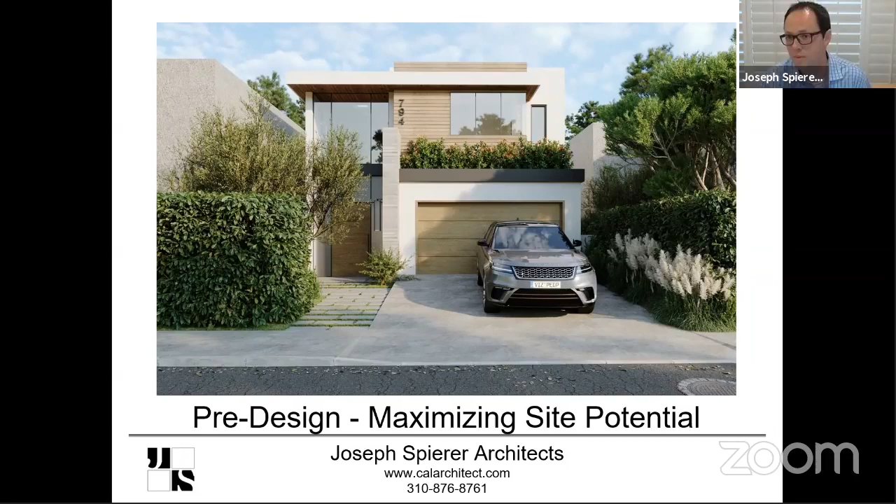There are 9 of us right now, and we specialize in high-end custom single-family residential architecture. We also do some multifamily and commercial as well, depending on the project. But basically, my experience has to do mostly with figuring out single-family residences and making sure that they work properly, and making sure that they're going to be designed and built correctly, because it's a long process and there can be bumps along the road, and the idea is to prevent as many of those bumps as humanly possible.

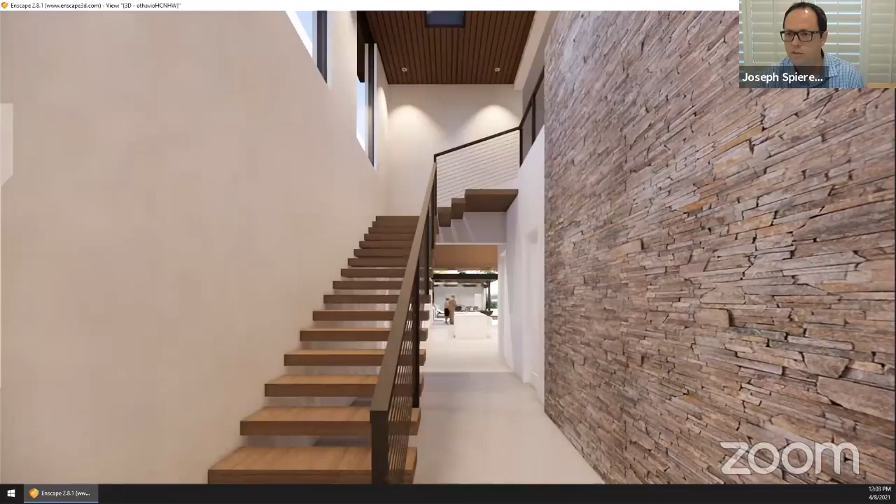So I wanted to start by showing you guys a new software that we use here. This software allows us to—you guys can see me moving around, I assume, right? Here, yep, we see it. Okay, 3D view. So basically this software allows us to show our clients what the design is going to look like inside of their home.

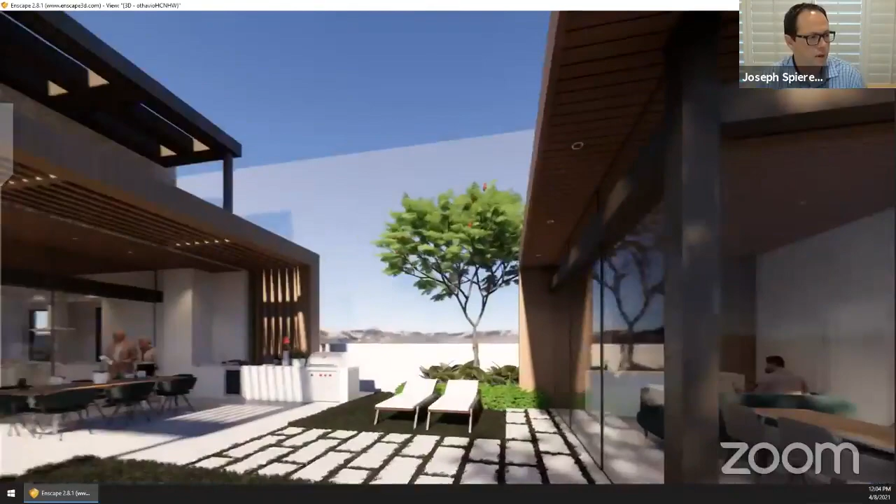I'm sure you guys are kind of familiar with accessory dwelling units as well. This is an accessory dwelling unit that we've designed on this lot in Manhattan Beach. You can see we have designed the house to work well with the structure in the back. I'm happy to chat about ADUs at some point if you guys want to. I thought this is always a fun thing to show at the beginning, to show the power of what's possible now from a design and presentation perspective.

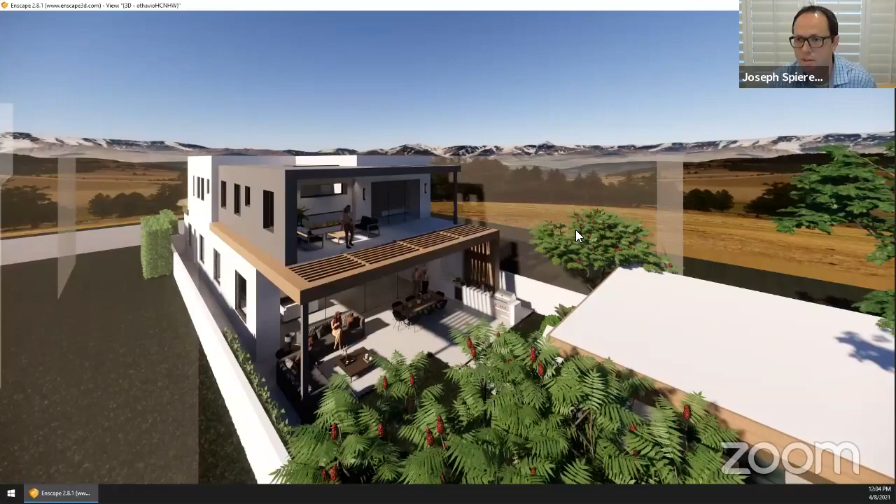Kind of fun. All right, so I'm going to re-present my PowerPoint.

So basically what I'm here to talk to you guys about today is pre-design, right? There are different phases of architecture, and they all have to do with design and permitting typically. Pre-design is a phase that occurs prior to anything being designed, it's called pre-design for a reason. It usually takes place during, let's say, escrow—it might take place during your inspection contingency period, during that 17 days, figuring out what can and cannot be done on any given piece of property. And there are different types of analyses that need to occur.

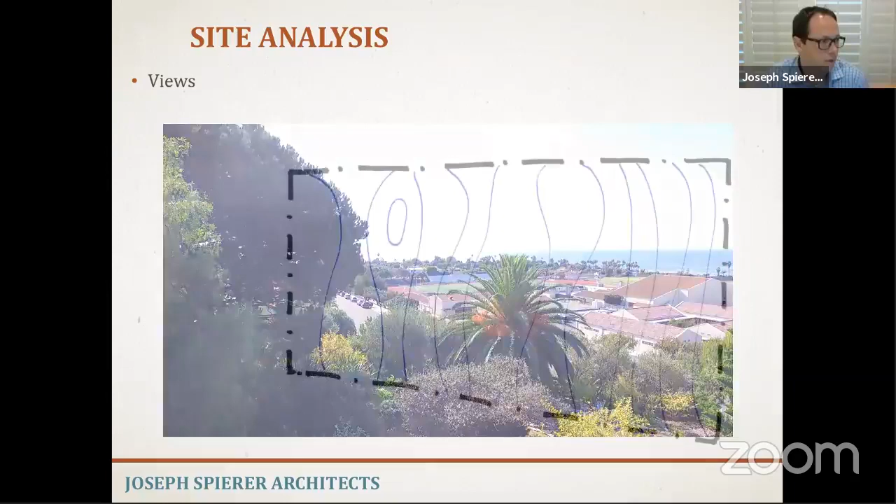Let's take views, for example. Imagine you have a slope—these contours indicate a pretty steep slope.

I'm going, I'll talk to you later on. I got, I'm in a class. By the way, feel free—if you guys have questions, feel free to interrupt me. I am more than happy to take questions during the presentation. This is a small enough group where I think it would be a-okay to do that.

All right, so site analysis—this is a pretty steep slope here. Imagine this is the top of the slope, and this is the bottom. It might make the most sense from an economical standpoint to place the house along the contours, right in the middle of the site. That's the most economical way to go about it.

However, if the view is off in a different direction, then it makes more sense from a view standpoint to put it maybe higher on the site, not necessarily in line with the contours. That's a very expensive decision to make. It's not that you shouldn't do it, but you should know the cost impact. What if the predetermined pad has a house right here, but ultimately you want to build a house right here? What are the cost implications of that?

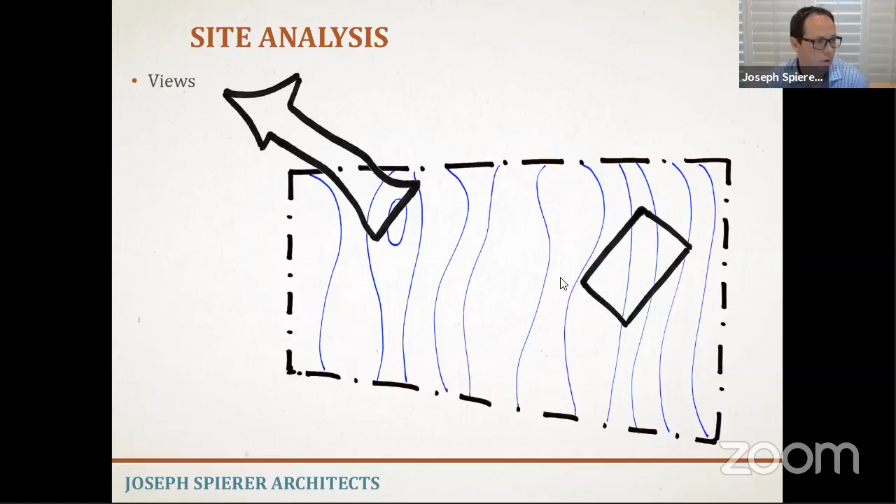That's something that we help determine during the pre-design portion of the project. You also have to know where you're putting a house and what obstacles you're going to have to deal with in any particular situation.

For example, this is a project we had in Palos Verdes Estates where you can actually see the project. I'm going to zoom in right here—you can see the flags here, coming across here. That's our project right over there.

And the view you're looking from right now is an objecting neighbor's house—this is their porch. During the process in Palos Verdes Estates, all of the neighbors have the opportunity to stand up, and they get a full 3 minutes to speak about why you are blocking their view.

This particular neighbor, where I'm standing right here looking at our project, objected—and they're I think 4 or 5 streets back. They objected because they said we are, quote, decimating their view by building this house right here. And the Planning Commission hears this—they'll actually sit there and hear it.

Knowing what the process is in any given city is important if someone is looking to develop any particular piece of land, add on to their house, add a second story, or even just do a simple interior remodel, which may have some of these issues, although not nearly as many as otherwise.

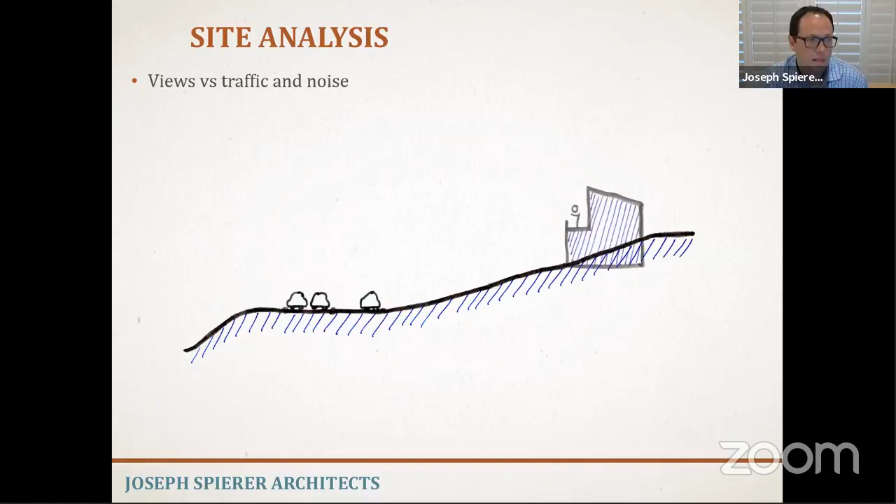From a site analysis standpoint, what are my views going to be like? It may not be as simple as placing the house and saying this is how we're going to maximize the view. It might be important to do some diagramming to understand. This is a very simple hand sketch representation to show you what we do, but ours are more hard-lined, and they'll actually go through the actual site and show you what your sight lines are.

Basically what we'd be determining is how can we maximize view while preventing some of the noise and preventing some of the other things that maybe we don't want to see.

This is a highly simplified version of a client who approached us and said, I think I want to buy this property, but only if we can block the traffic. I don't want to see the traffic from down below, and I want to make sure I can see the mountains and the water beyond. But I also don't want to hear nearly what I'm hearing right now.

So we did some analysis. It was more complicated than what I'm showing you, but basically, to show them, this is a simplified version, that yes, if you put a site retaining wall, and yes, if you put proper foliage there, you are going to be okay. So they ended up closing on this property, and they were happy that they did.

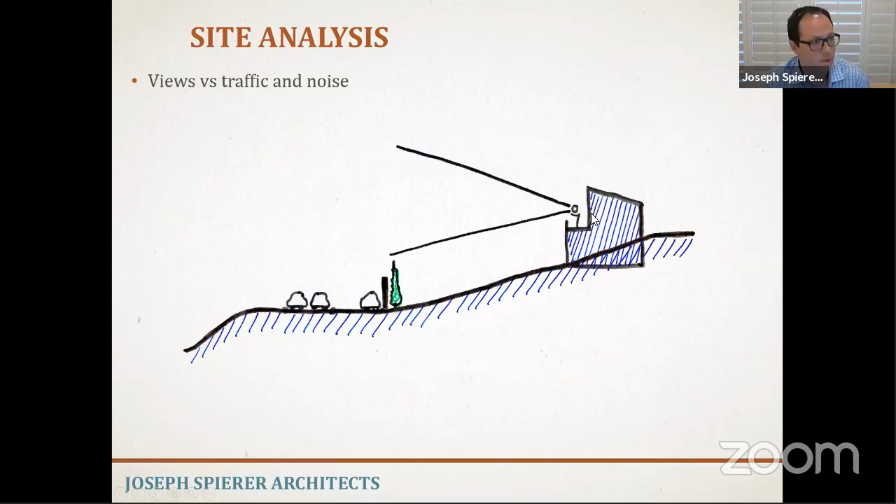Another situation that might come up for site analysis: this is a house we did in Manhattan Beach years ago, and it had power lines running, God, a foot in front of the property. They were terrible with the house that was there at that point. The house was a one-story house, and the power lines were kind of swooping back and forth right in front of their windows and everything.

So we actually did a section analysis to help determine where those power lines were going to sit. Once we put a second story, was it going to be right in the middle of this view? Or would the power lines line up perfectly with the floor plate as they come by, so we don't have them right in the middle of what we're trying to accomplish here? That's what ended up happening, we did that site section, and once we actually designed and created a house, there were no power lines in sight.

So it's an important thing to analyze at the beginning. All right, something else to think about are things that are protected, for example, protected trees on your lot.

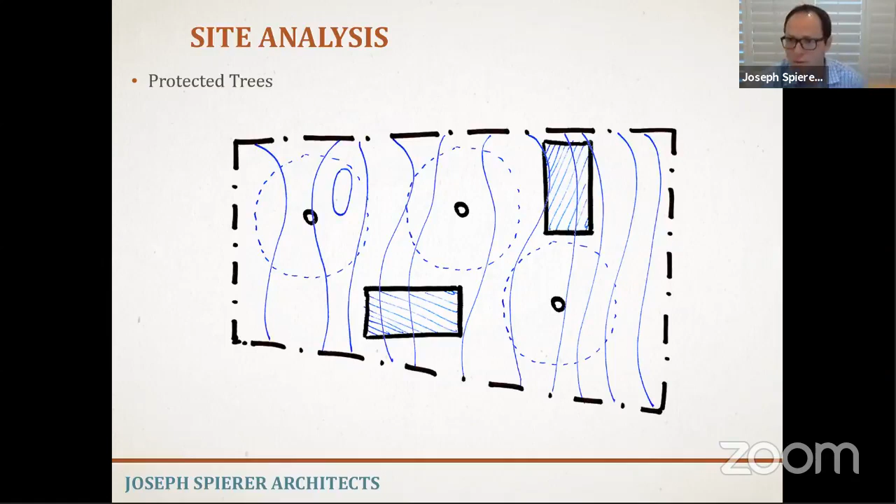Another one of the things it could be is drainage. It could be that they located it so water could go past the house properly. If you do have a house blocking the water, there are ways to mitigate that, but they're expensive, and you have underground water to contend with too. The last thing you want is hydrostatic pressure from underground water pushing up on your foundation.

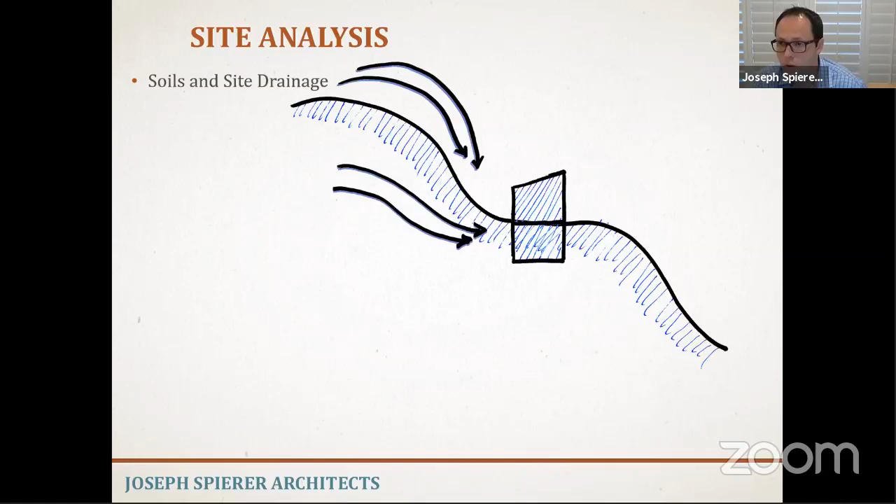If you go down into some basements, you can see that white powder on basement walls. That's water leaking through the basement, and that will eventually cause mold and other damage. Being able to know what type of situation you're going to be dealing with at the beginning is important.

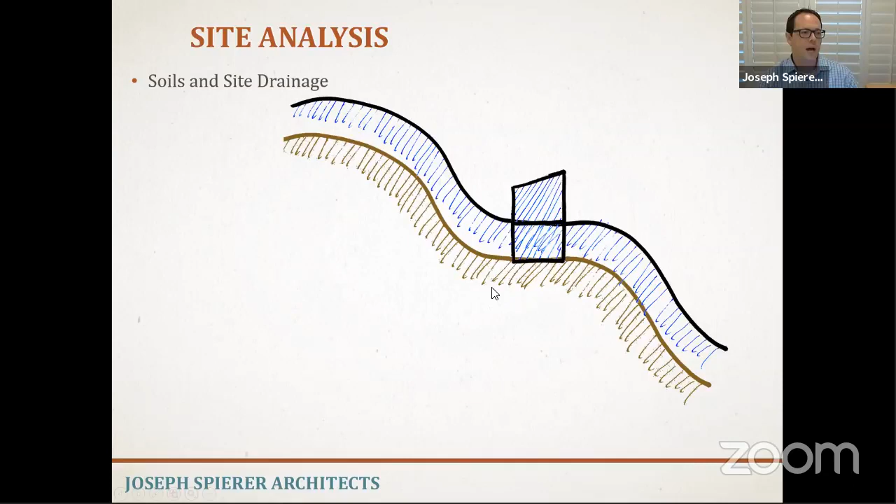Another situation might be, where is your foundation going to be? This is probably the most important thing on hillside properties: soil. It's almost always soil. What does your soil look like? Where is bedrock? If it's underneath the basement, like I'm showing here, holding up the house, that's not a problem. You have a fairly inexpensive foundation.

But if your soil is way down there, then you do have a problem, and you end up having to put these massive caissons or piles underneath the house to hold it up. And these are not inexpensive.

We did one on the cliff of Palos Verdes Estates, on Rocky Point. It's being built right now, $2.5 million straight in the dirt. They actually hired us for pre-design at the beginning to think through this stuff, and they accepted it. They said, look, I get it's going to be an expensive foundation, but I don't care, I'm ready to move on. But their attitude would have been different, I think, had they found this out after they owned the house. So knowing this information ahead of time is a good thing.

Do you have any information on expansive soil? Since right here in Torrance, we have a couple of housing tracts near our office that have that. Yeah, well, you have that a lot around here.

That's why it's important to know what the soil is composed of. Is the soil going to be silt? Is it going to be sand? Do you have water that's moving through the soil constantly, creating heaving? You have all sorts of issues, and that's why you end up with cracked foundations and all sorts of other problems.

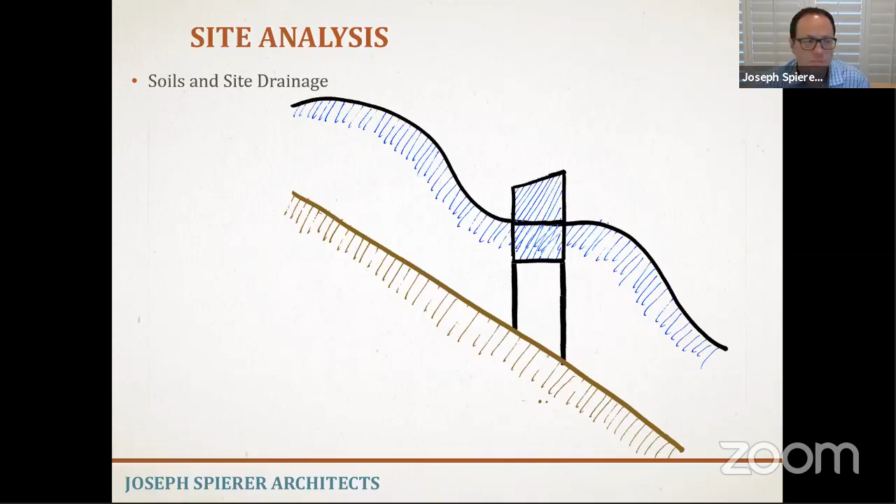But the question really is, is that cracked foundation indicative of a very difficult potential solution if you want to demolish and build new, or is it going to be something that doesn't matter much? Maybe it's done settling forever. And that's something that soils testing can help figure out.

So this is that project that I was telling you about, on the cliff of Rocky Point. This is a crane that was used to hoist these — 120-foot long steel beams. That's 12 stories of steel beam that is going to get hoisted up.

Oh, does someone have a question there? No, just noise. Okay, great. Danny, are you able to mute them? Okay, great, sounds like that's good.

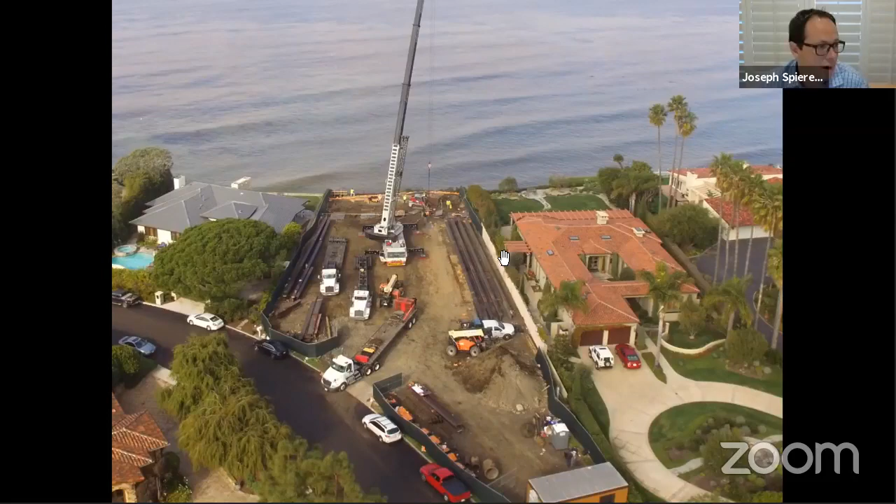That's going to get lowered into a 12-story hole so that concrete can then fill up that hole around that beam, and that's essentially what a caisson is. This is just a 1-story house that we're designing — you can actually see it under construction if you drive by today. But a 1-story house is being held up by 12 stories of concrete and steel, and again, $2 million straight into the ground. So it's important stuff to know ahead of time.

So when the hill slides into the ocean, the house will still be standing. That's exactly right. Well, that's another interesting point.

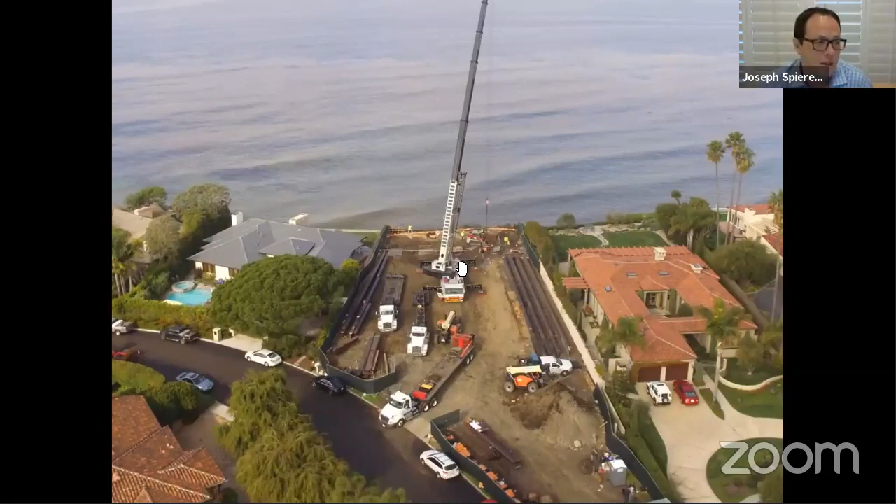Another thing we determined during the escrow period, which was fascinating to me, is that the California Coastal Commission doesn't actually let you do anything within 50 feet of the cliff, because they want it to be natural. They won't let you shotcrete the side of the cliff, and they won't let you stabilize it. They want it to slough off into the ocean as it was intended, as God intended. Basically, that means about 50 feet back was where we had to put our caissons. The rate at which my client is losing his land to the ocean is 1 foot per 10 years, so he figures by the time it gets back to him, he'll be long gone.

But obviously he wanted to be as close as possible just for the view, right? That was what the placement was for. Yeah, he has like a 180 panoramic view.

Oh yeah, the view here is outstanding. Being able to see everything from all angles is amazing. So I'm guessing that's Catalina, right, that we can just barely see in the clouds? Oh yeah, you're right. Well, actually, I don't know if that's what it is. It might just be the shadows. Catalina is out there somewhere.

All right, so height limits. This is another thing we always have to consider: how high can you go? Just because you have it doesn't mean you can still have it. There are certain areas of the South Bay, for example, where the height limits have been decreased over time. Depending on where you are, if you're in Manhattan Beach, your height limit is your height limit. That's it, it's in the code.

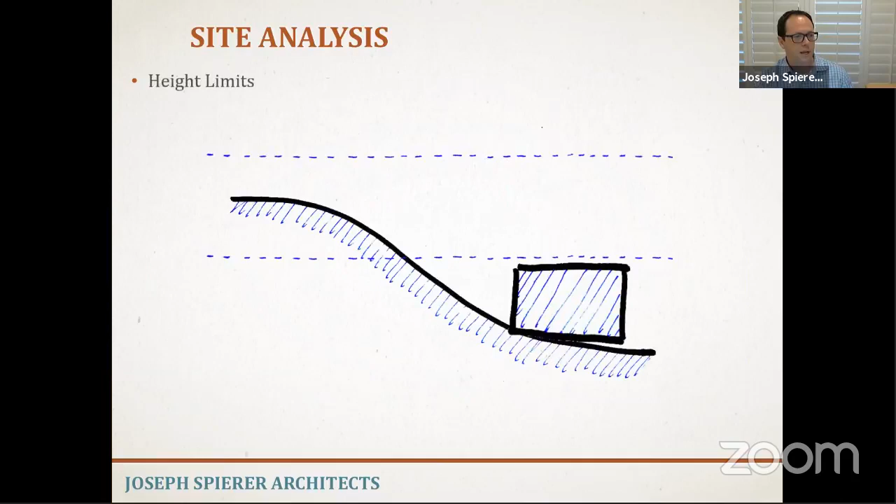There are many different ways height limits can be calculated. Sometimes it's based on your slope, so this might be your height limit in one situation. It could also be based on the 4 corners of the lot, giving another height limit. Then you'd have to dig down here if you wanted to get any sort of house in this spot. It could also be based on the lowest possible grade. We all hope it's the higher level, but that never happens—it's always something more restrictive.

A question I get a lot is about variances. What is a variance? Can I get a variance? The answer is often, unfortunately, no, but I'll explain why. Basically, a variance is meant to help someone who has an abnormal lot, an abnormal site condition—it has nothing to do with the house.

So I often get asked, well, what if I have a house built here and I just want to add a little bit into my side yard setback, or go a little higher than my height limit just because I want to? The answer is you're never going to get a variance for that. A variance, again, is meant for something that's abnormal.

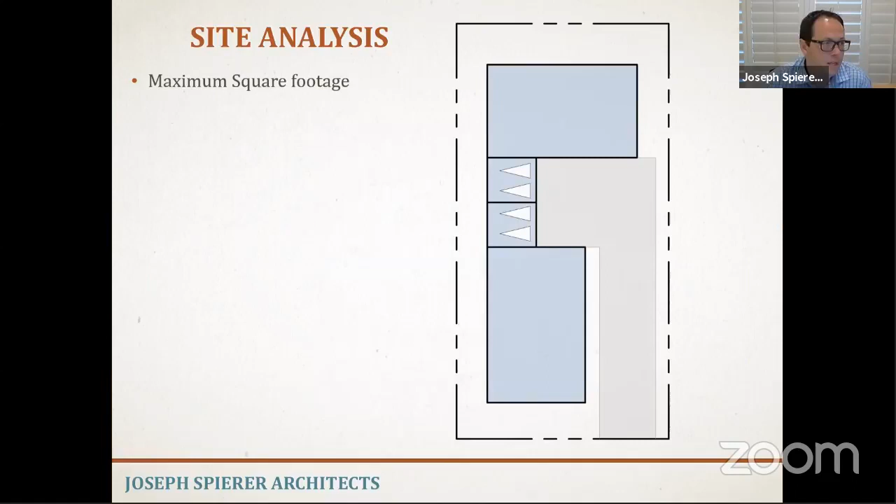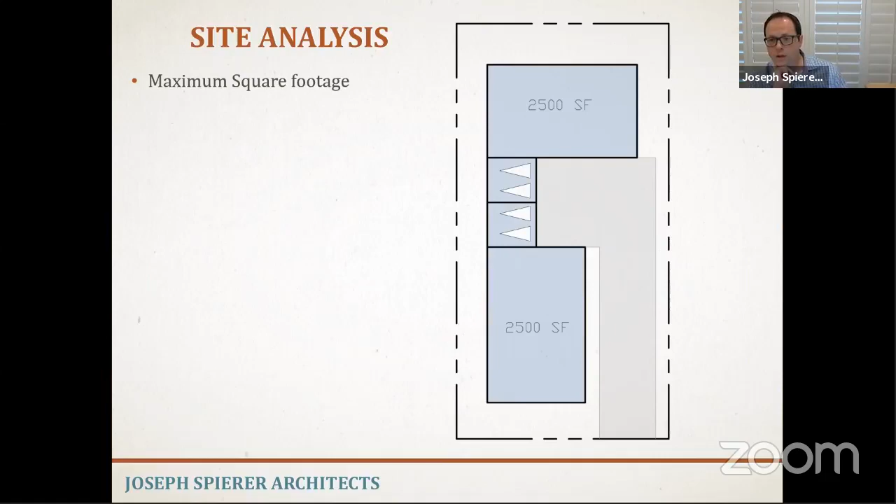So another piece of site analysis is how much can I build? Can I build, for example, this is North Redondo on a 50 by 150 lot - this is the absolute most efficient layout that can be created on that lot. Basically, part of site analysis is laying it out and figuring out what you can do. Based on the driveway requirements, garage requirements, and backup space requirements, you can get a maximum of two 2,500 square foot homes on a 50 by 150 lot in North Redondo. So this is the type of analysis that can be done here as well.

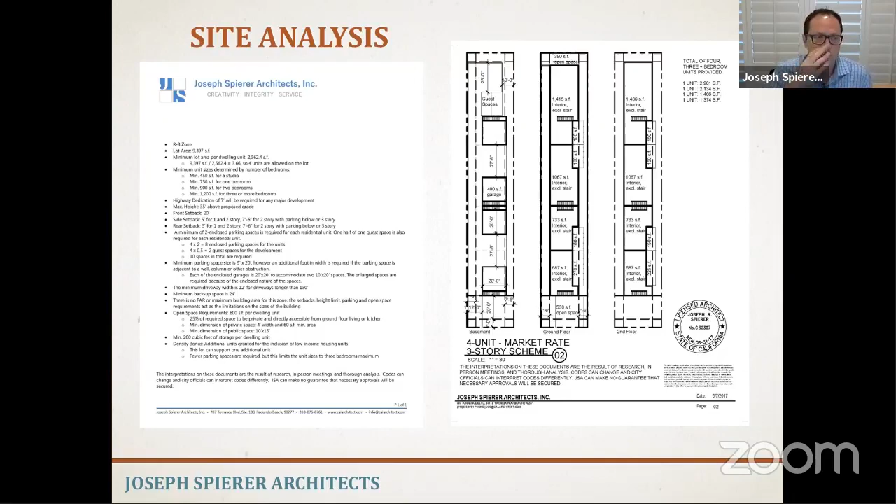We do this all the time behind the gates in Rolling Hills for houses, for example, because they have very complicated rules of what you can and can't do back there. And just because you have a giant lot doesn't mean you can build more than 1,000 square feet, right? Because ultimately it's based on the pad size, how much flat area you already have. It's based on a number of different factors, access.

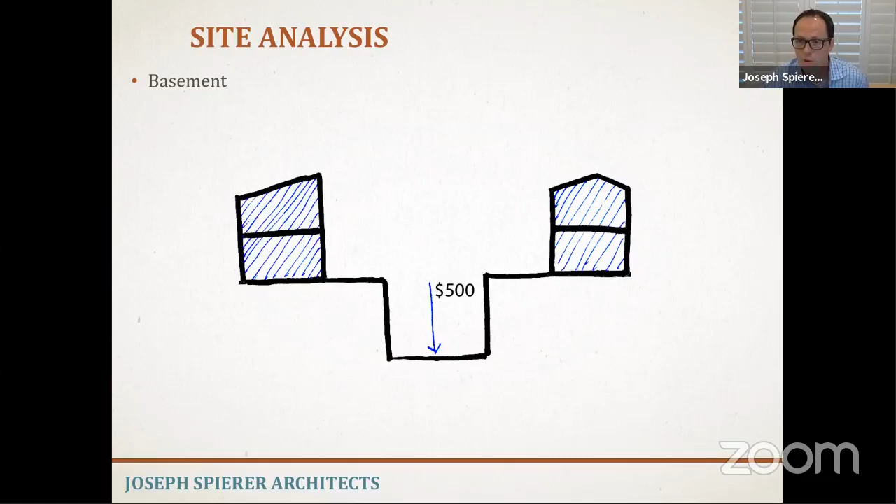Okay, great. All right, so basement, right? Can I do a basement, and is it going to cost me an arm and a leg? And the answer is it might, right? So basically, if it costs $350 per foot to add on grade, to add on the top level, as you go down one story, maybe it's $400 a foot to build down, because you have everything you had up above, but now you have the site retaining and the shoring, and it's more expensive. And as you go down further, the price per foot might go up. So maybe the first level of basement is $400 a foot, and the second level is $500, right?

Okay, great, I guess that was the end of the presentation here. All right, so are there any questions at this point? I don't see any in the chat, but I guess back to that one with the basement.

I noticed, at least when you're walking down near the Strand homes, they're not really basements. They're just kind of set a little bit lower, so either you have to step down into the first floor. I'm guessing that's so they don't have to build too high, but I'm guessing it's also cheaper because they don't have to dig down as far.

There are definitely those reasons. There's also the fact that in Manhattan Beach, you actually have special rules for basements, right? If you have a walkout basement, it counts towards your overall square footage. If it's a partially covered basement, it only counts towards your overall square footage 30%. And if you completely bury it, then it doesn't count at all, right? So you can actually get more square footage depending on how the basement is laid out. But you're 100% correct, partial basements are less expensive because your shoring and site retaining costs are lower. Further, every foot you go down is a great deal more expensive than the previous foot, so that's why you don't necessarily see a ton of basements all around the South Bay. You see some, but they're usually in areas where it makes more financial sense to put a basement.